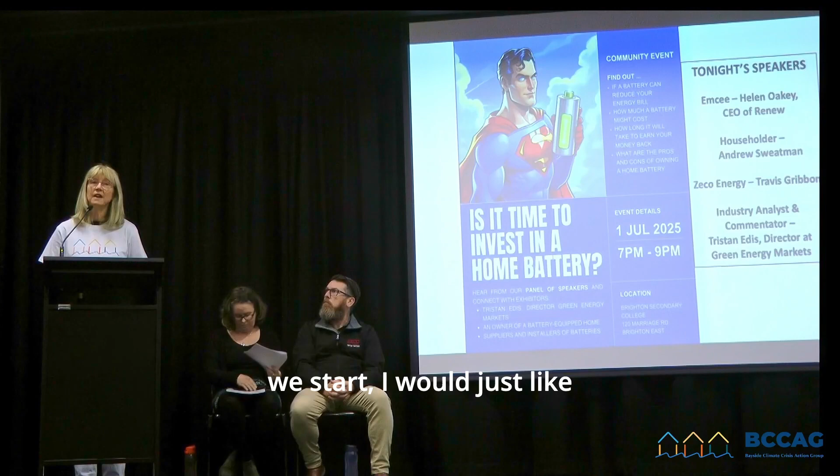Welcome everybody. Before we start, I would just like to acknowledge that we meet on the lands of the Bunurong people of the Kulin Nation, and pay our respects to their elders, past, present, and emerging.

Just to give you a little bit of background on BCCAG, it started about 19 years ago in 2006, and it's grown over the years to currently over 1,000 people receiving the newsletter. I think it was about 1,024, not that long ago.

We are a volunteer organisation and not-for-profit, really looking at how to minimise the effects of climate change and increase sustainable living. We do this by creating and delivering information, facilitating action, and influencing decision makers.

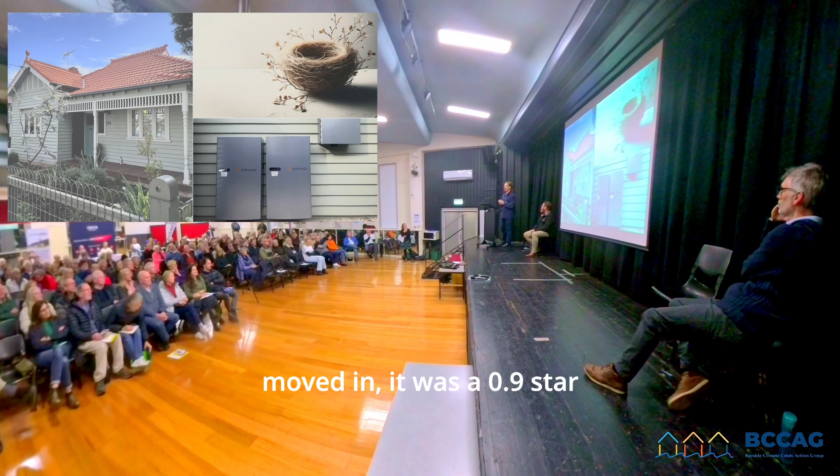It's my wife and I living in the house, sort of empty nesters. We have our son who moved out recently, and it's amazing how, when a young son or young adult moves out, how much energy savings occur as well.

Long showers. And this is our most recent addition, the batteries, which I'll explain in a moment, that go down by the side of our house. And the fact that they're by the side of the house next to weatherboards is a whole other story.

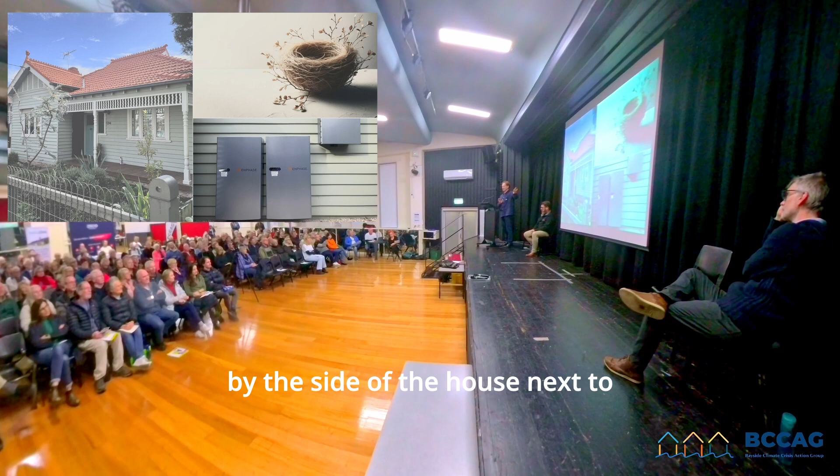So what do we actually have as a system? We have a 10.5 kilowatt solar system on the roof. It's got Enphase microinverters, and there's some trees around the house.

That was a recent revision of what we already had in the house. It's a lithium iron phosphate battery - obviously you're trying to get the safest possible system. It cost about $10,000 all up.

We did do it 9 months ago, but given the amount of time it takes to do any renovation these days, I think we ordered this like 2 years ago. It just takes that long, please.

All right, this is where it gets a bit challenging. So when any salesperson says, would you like a battery, and it's like buying just a fridge, we'll just bang it in - it's not the case. Really, you have to basically make sure it's got space around it, 60 centimetres either side, 90 across the top. If it's near a habitable room, you have to make sure there's fireproofing.

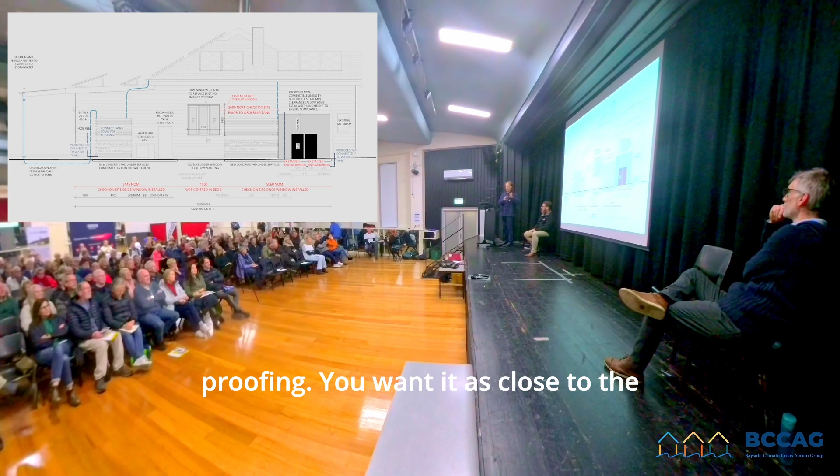You want it as close to the meter system as much as possible. We were trying to do all these other sustainable options, like all the water tanks - they're our water batteries. And we have our hot water system, pumps, etc.

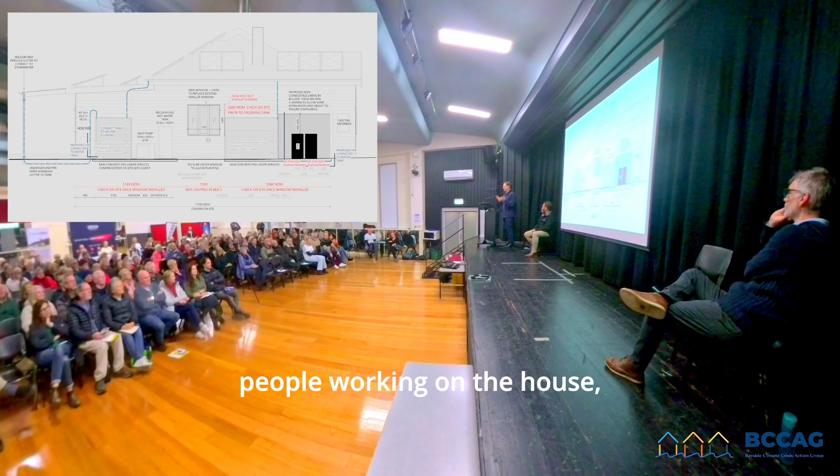The key thing really was, because we had people working on the house - this is probably my OCD tendency - we had to have everyone there on the day. If the supplier said he's going to sell it to us, he or she has to be there to actually back up what they're going to provide. You have to come and show where you're going to put it, not just leave it to the contractor. So we had that person, the electrician, the plumbers, everyone there, because it's really important, at least from my perspective, that you just don't get dumped with the system.

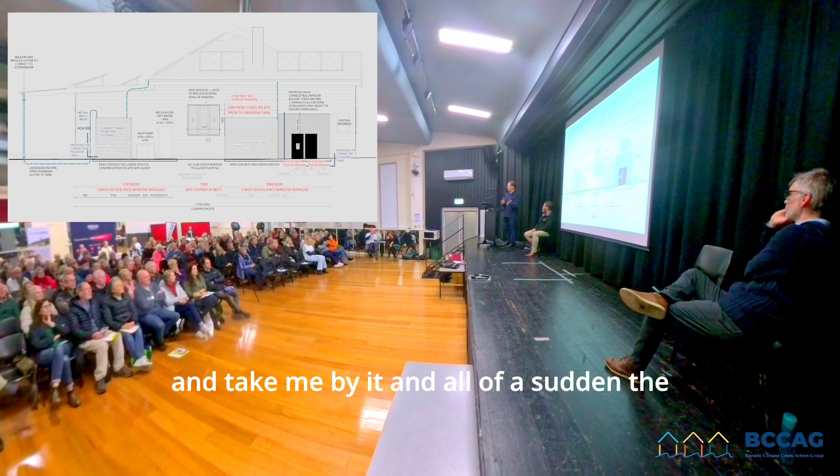It's like you buy it, and all of a sudden the contractor turns up and you wonder what did they sell me, what was all this system about. So it's really important to make sure the line of custody of the person who's selling it to you is actually there on site to represent what the contractor is going to do.

So this is one of the issues we had - we wanted to maintain the heritage style of the house. We really didn't want a big fibro sheet down the side because of fireproofing, so we got a fireproof product. It's on the left, and the front of the house keeps the old weatherboards - you won't know the difference, but that was the whole intent. You could basically go fireproof on one side of the house and keep the rest of the weatherboards without impacting it.

The company was very generous about it. In the end I said I'd spent a lot of time doing project management between these guys and wanted compensation, so I got them to pay me some money, because I'm not prepared to spend 8 hours of my day managing guys who don't know what they're doing on site. They're not bad guys actually, but the fault is in the sales - independent contractors not often talking to each other carefully enough.

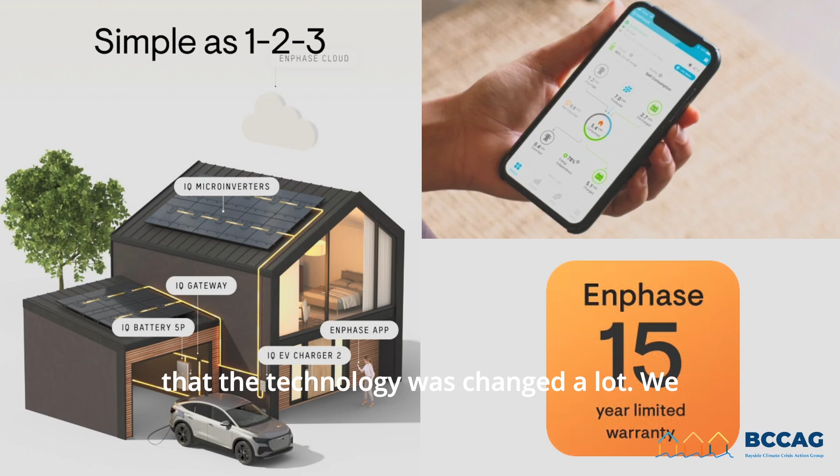Okay, the advantages of the system we chose - we did go with the Enphase system. Again, because we bought it 2 years ago, the technology has changed a lot. We wanted Enphase microinverters with shade management, and as we say in business, we wanted one neck to strangle - we didn't want lots of different hardware solutions. So we went for an integrated solution. It gave us a simple dashboard, and the critical thing is once you get information in the dashboard it improves the system so much, because you get an understanding of how you're actually using the power. We also went with a company with a 15-year guarantee on the system, which was quite important.

Now the disadvantages with the system we went for. We don't have an EV - we almost ticked every other box. We have the solar, we now have the batteries. You might see the banged-up Prius out front - we just don't drive very much, and we're in Northcote with off-street parking. So until we can get some mechanism to take advantage of that, we haven't been able to yet, but we plan to in the future. It wasn't Australian made - we tried to get every other component in the house with local content, but that's not possible. And we don't use a virtual power plant at this stage; I really want to run a year exactly how the system would work, then start to make decisions about how we evolve it.

The bills - this is the source of truth. We can do lots of modelling with everything else, but this is the information we get from Diamond Energy between October and mid-June.

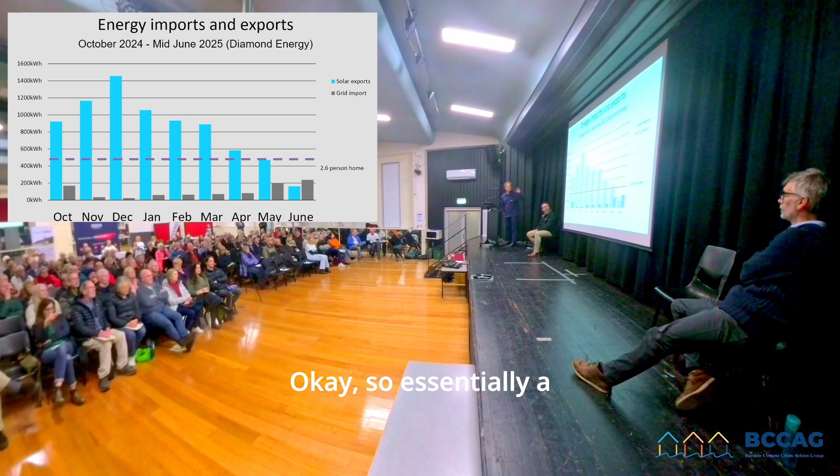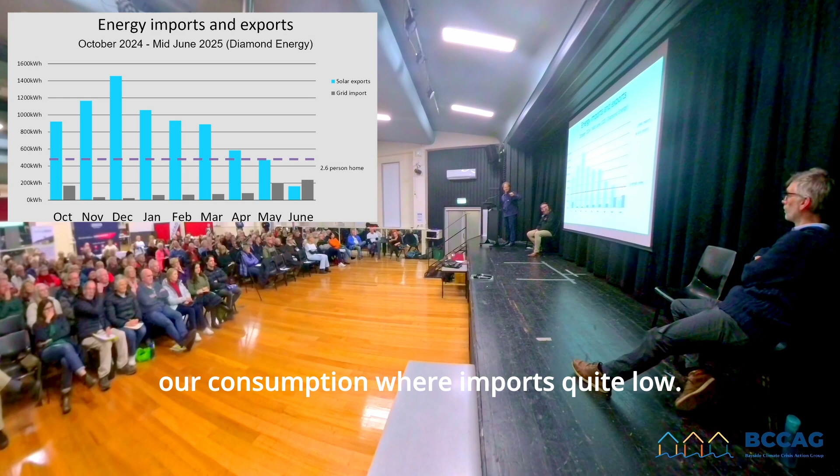So essentially this is a standard household of about 2.6 people - we're about 2.5, though with our Sunday showers it definitely felt like 2.6. The blue is what we push to the grid, so you can see we're doing very well with the solar panels, pushing sometimes 2 to 3 kilowatts over summer. It obviously gets worse in winter, but the battery and our solar consumption keep our imports quite low. That's straight from Diamond Energy, our retailer.

This is how much we spent. In December, we got a credit of $504. Then we got $120, and most recently we paid $12. That's not just the energy costs, that's all the fees and everything. So it's a total bill, we got credit, and it's up there.

But I was wondering, does anyone know why we got a $504 credit at that period of time? A 60-cent feed-in tariff. Bingo! That was a 60-cent feed-in tariff for 3 weeks. If we had gotten the 60-cent feed-in tariff for all of this period of time, we would have made $4,500.

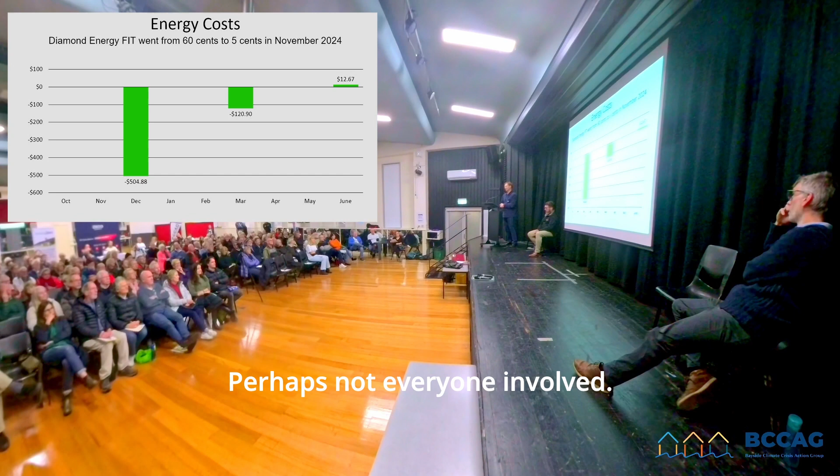So there you go, perhaps not equitable, but how does it change that system? We bought it in 2007. They changed over all the solar panels in October, and they didn't cancel it, they just kept it going for 3 weeks. November 1 was the cut-off date. So it was a strange little series of events.

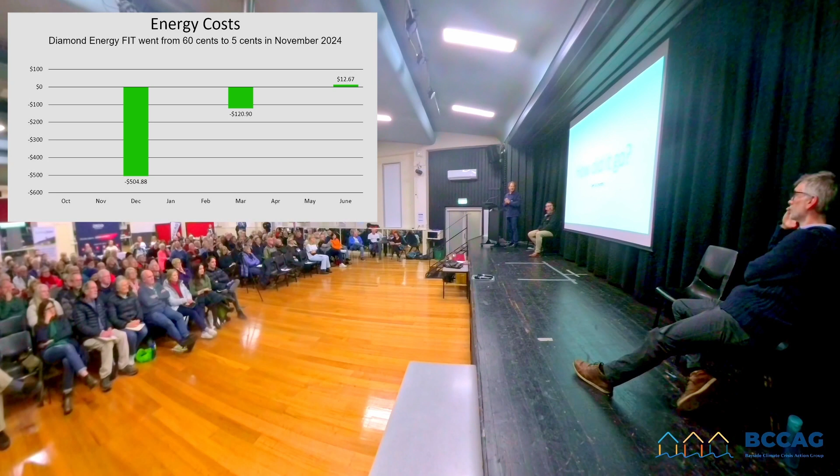Next one. So, how did we go? This is sometimes like the good and the bad, and gee, weren't you going to make more money than that, sort of thing. So over a period of time, last October to June, we've made, well, saved $1,035. Most of that is solar in use. Essentially, like everyone else here, solar is responsible for most of our energy consumption.

We use the panels, we do get a little bit of feed-in, not as much as we got in December, and we use the battery at night. Next slide. So it's only $250 we made in that time, but most of that was summer, and this is what we found—there's such a seasonal difference in these systems.

Next slide. So normally summer, it was great, everyone's enjoying themselves down at Brighton with the sun, and that's reflected in the next slide, which is exactly what happened. The battery at the bottom is the green bit. It barely dips—well, this was Christmas Day, we weren't actually here, so it's a little bit of a cheat. It barely dips at all because we don't really dip into it at all.

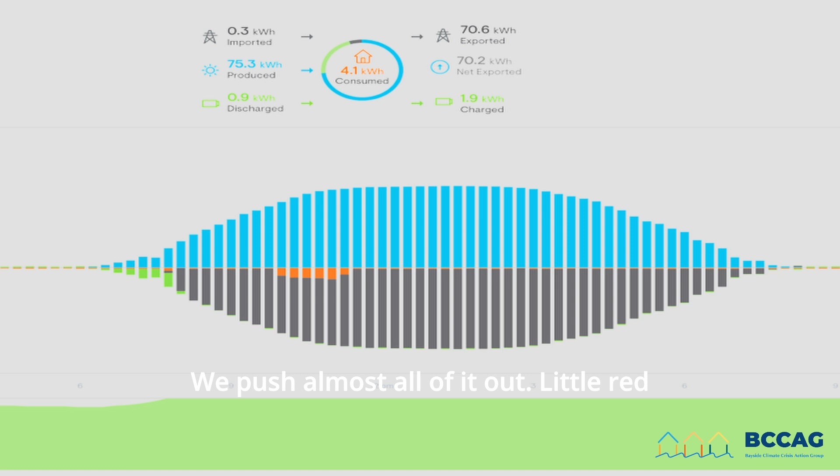We push almost all of it out. The little red bit is where I forgot to turn off the hot water system when we were away, so it wasn't perfect. But essentially, on those days, we barely use the battery at all. It's a terrible return on investment on a day like that for a battery—very good for solar, terrible for a battery.

Next slide. But Melbourne's not always like that, pretty much like today—it's pretty grim. Next slide. We turn on our heat pump, we have underfloor heating in the bathroom, we start to use our induction cooktop—everything a bit more in winter.

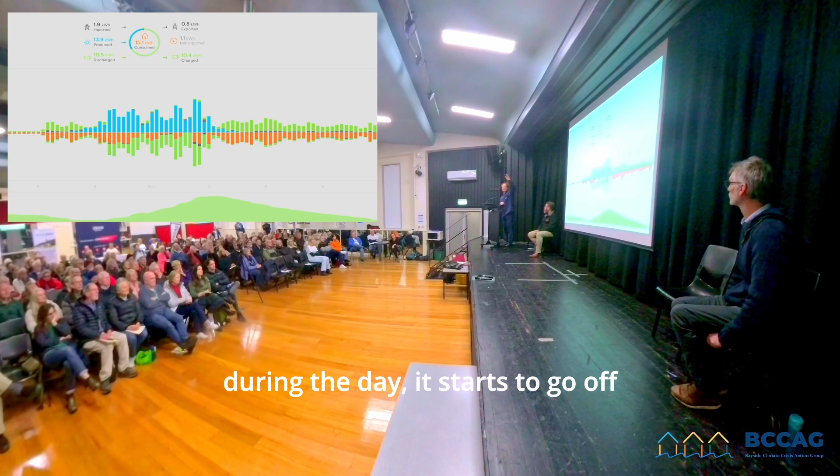And therefore what happens, next slide, is the graph starts to change dramatically. You can see the green bit at the bottom where we're drawing a lot of the battery overnight, dips a little bit in the morning when the underfloor heating in the bathroom turns on for people to have showers. Then during the day it starts to go up again, a combination of us using a bit of power, pulling up the battery, and then we start to pull it down again. So we're discharging—it's like we've got a 10 kilowatt hour battery where we're using it all up. Much better return on investment because we're actually taking advantage of all of the capacity of the battery.

Okay, next one. So this is really the seasonal variation. In December, we may make $4.50. In June, we made about $4. The green bit at the bottom is the solar we're using ourselves. The blue bit on the left is what we're getting from sending solar to the utility.

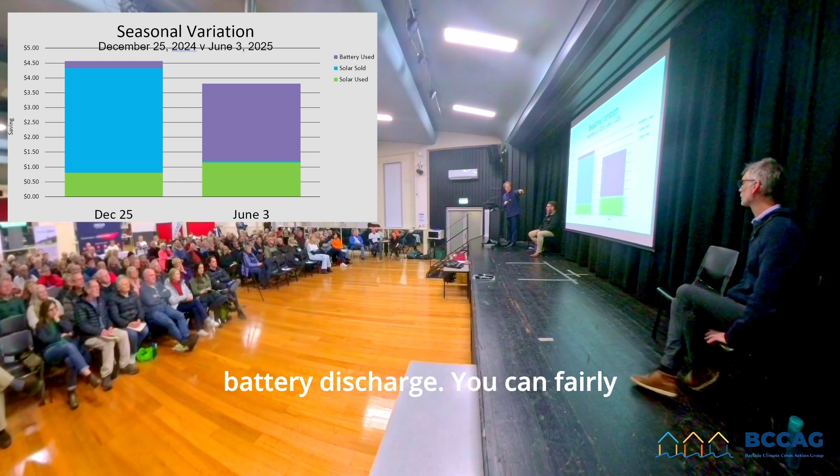And then the little bit at the top is the battery discharge. You can barely see the solar on the right-hand side—most of it is battery discharge. We're not really pushing much to the grid at all. We're using it all up, then storing it, then pushing it out at night. So it's almost like there's two, at least in our experience in Melbourne—two different models, summer and winter, and everything in between.

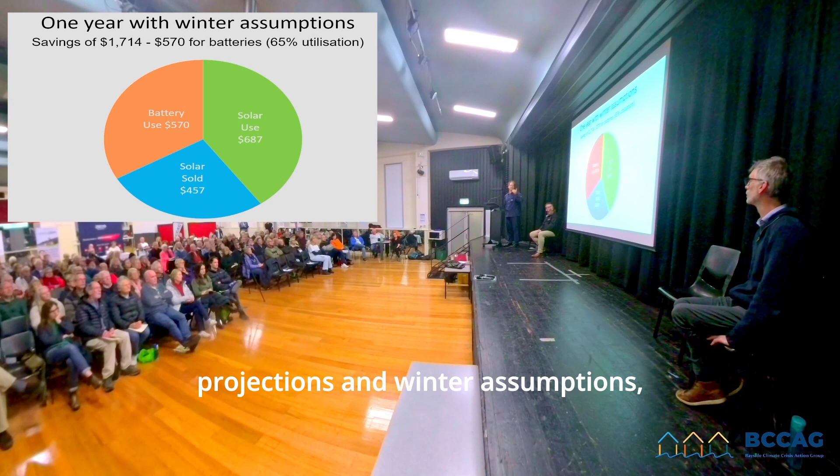Next one. So this means I looked at some projections and winter assumptions—what we would be saving over a year, with a few more months to go. This will probably make about $1,700, with $687 from solar powering us.

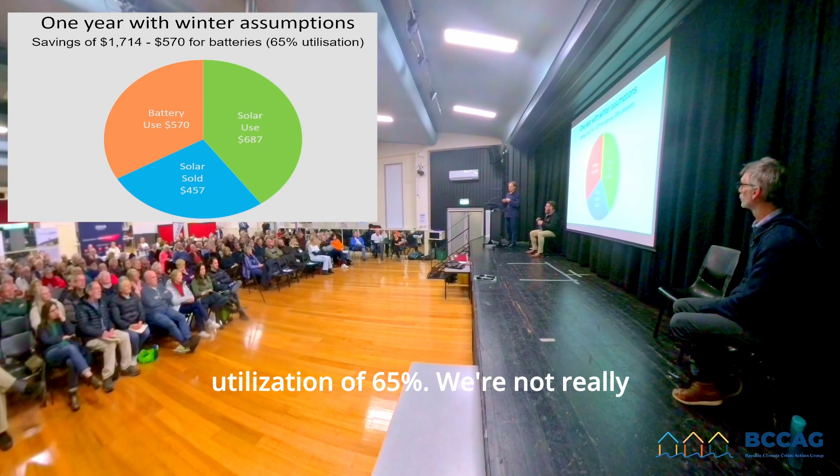We'll be pushing some to the utility, and we'll probably make about $457. But that's because of that differentiation - we're only really using the battery. We've got a 10 kilowatt hour battery, but we're only really utilizing it at 65%. We're not really making the most out of it. Well, one season we are, one season we aren't.

So for the payback assumptions, people shouldn't just do a straight economic calculation. They should actually look at costs going up, battery utilisation going down, a feed-in tariff of 5 cents, and purchasing energy at 25 cents. We found that, pretty much like solar quotes, our return on investment was about 12 years - we paid it off in 12 years, with a 15-year guarantee, so by the end of that time we've made some money.

But we're only using 65% utilisation of the battery. At least we're learning - we're learning what the technology is and how to use it better.

If we were to consider a virtual power plant, a VPP, Diamond could give us $200 to $450 as a sign-on bonus, or at least a reverse fee, and that would give us 30 cents per kilowatt hour in the evening periods. So we could start to make more money - we could make another $687, and probably make $1,248 all year from the battery.

But if we've got an EV and charge it from a combination of solar and the battery, we'd start to make a lot more. So all these people have got EVs - great, that's where we want to be. We want to start using electricity rather than petrol.

So the next steps for us - I'm a sucker for government grants. We took advantage of the green loans in 2007 to get a green loan. When they were phasing out the 60-cent feed-in tariff, we quickly jumped on and got more panels at that stage, so we've expanded from 10 kilowatt hours to 20 kilowatt hours. Based on the assumptions, we'd really like to have an EV to maximise our returns, and maybe a virtual power plant. We'll see how that goes. I really want to run this for a year to see exactly how it goes - my brain is struggling with this amount of information, let alone more.

But the challenge is living in Northcote, we'd have to put some sort of mechanism in place, so unfortunately we're a bit challenged in that area.

So what have we achieved over this period of time? Basically, more importantly for me, we've saved 7.6 tonnes of CO2 from solar use and pushing to the grid via the battery - so essentially we've net zeroed our house plus another house in Victoria. We've gained 84% independence from the grid. I'd love to be even more, but there are limits given the values here - on a cold winter day it's impossible to get 100%. It's just not possible, at least in my opinion.

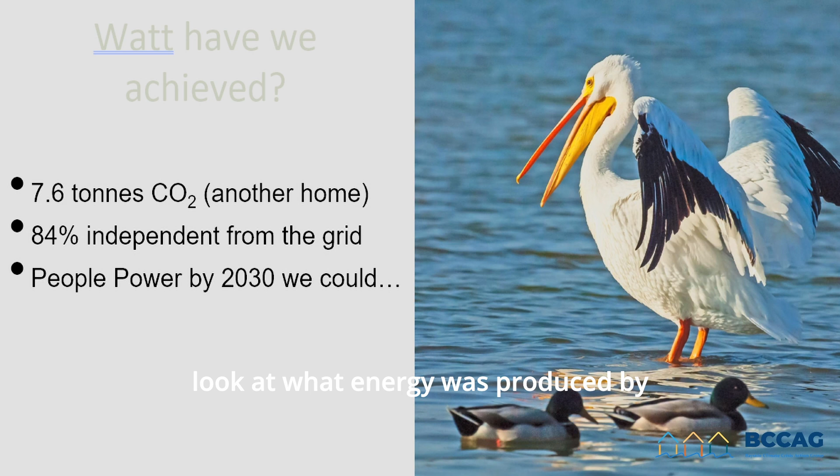But what's more important, and it was really great to see everyone here with the use of solar - I don't know if anyone goes back to 2007, but I imagine I was probably household number 8,000 that got solar panels. There are now 4 million households in Australia. If you look at what energy was produced by solar, it was probably about 12 or 13% household solar. So we've made a massive societal change with, I would say, people power. And whilst batteries won't solve all the problems, at least for me they send a very strong signal to both politicians and society that in the absence of really good energy policy, people will take it up and prove that this is really where we want to be.

By doing these things, we not only get return on investment, we send a strong signal to society and politicians that we should do more. What we've collectively done with solar, we could start to show is possible with batteries. So by 2030, we could have 2 million batteries.

That may start to break the camel's back. Let's get to a platypus stage. When I bought solar panels, they were 10 times more expensive. Anyone buying solar panels now versus everyone who invested in 2007 is getting 10% of the cost. It'd be great if we could get batteries to 50% cost and make it more equitable for everyone to do it as standard. And we can start to support our renewable energy targets. So thank you, let's move away from the duck curve and get to the platypus.

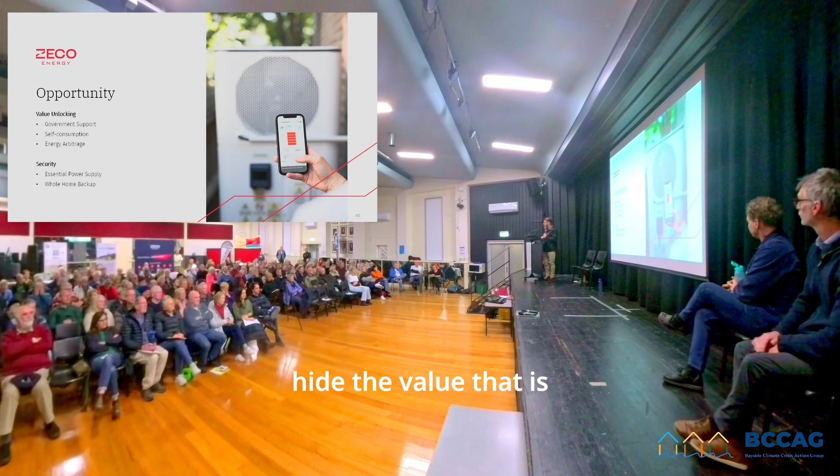So again, and I'm going to say it a lot, it's all about value. How do we unlock the value that's in market at the moment? Anyone who tries to hide the value that's present for any product and price solution is doing you a disservice. So that's the first thing.

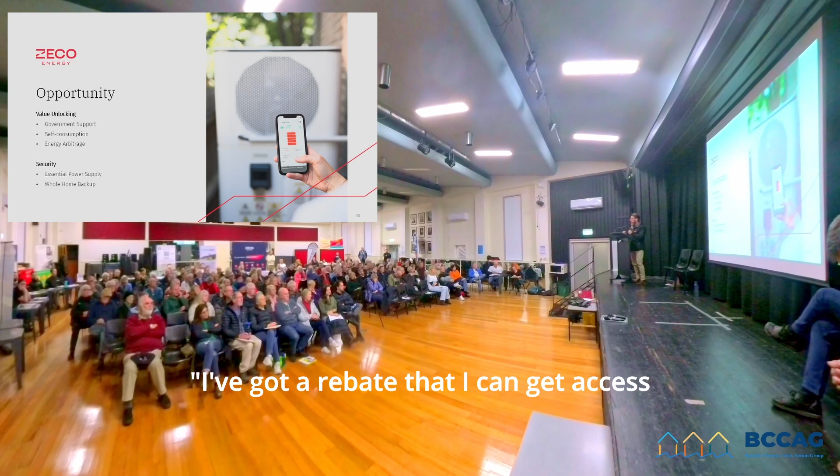As was already mentioned, there's government support - a federal solution based on usable storage that sits behind the meter for your battery. If we use 10 kilowatt hours as a nominal figure, it equates to around $370 per usable kilowatt hour. So you're looking at about a $3,700 rebate as of today. That drops in the new year with STCs, but that's what you're looking at right now as a rebate you can access.

Self-consumption, that was touched on in great detail - I'm glad I didn't put in all of the numbers, which is mine. But self-consumption is your primary focus. About 90% of people here put their hand up for solar. If you don't already have a battery, you will be pushing value out to the grid.

So how do we unlock that? We unlock it by making sure we're already generating it. Let's store whatever we're not using efficiently. That's the opportunity to really unlock some value, without even understanding what everyone in the room's retail tariffs are.

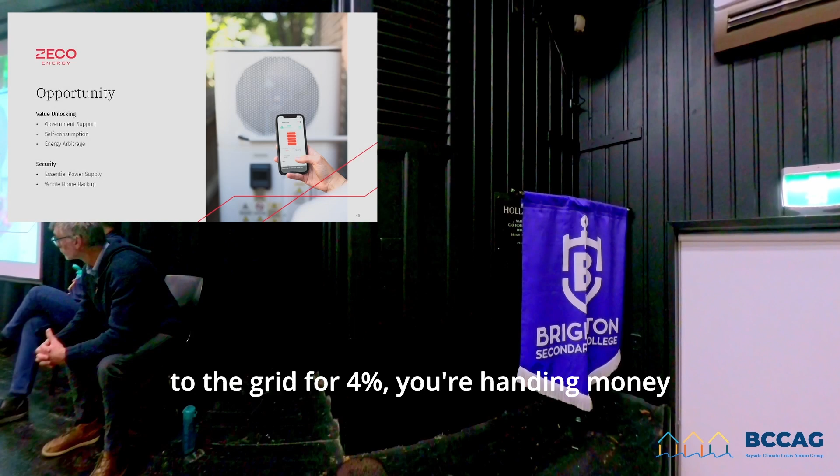If you're paying 25 cents off peak and 35 to 38 cents in peak, and you put in a PV system, you're generating it for anywhere between 6.5 to 7.5 cents. So if it's costing you about 6.5 to 7.5 cents to generate, and you're sending it back out to the grid for 4 cents, you're handing money over to someone who's going to on-sell it. So what we do is save 38 cents basically there.

The next thing is energy arbitrage. I won't go into too much detail, but if you can't generate enough at the moment based on the duck curve, which we're trying to turn into a platypus, we've got the opportunity to do a forced charge during the day. While there's excess production out there, draw that down at a zero tariff, or if you're playing in the wholesale market with something like Amber, you can actually get paid to fill your battery and then use it throughout the day. So from a dollars and cents perspective, that's the value you can unlock.

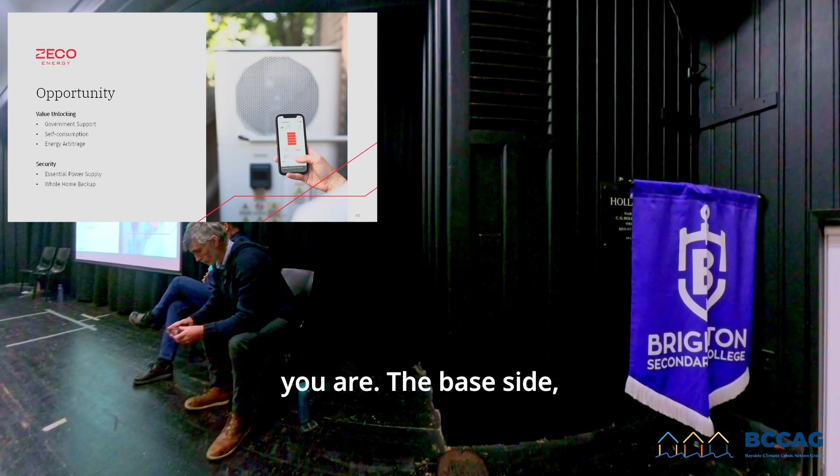Then there's the whole security thing. Depending on where you are - here in Bayside we're sitting in United Energy as a DNSP, pretty stable. If you're in the hills, it makes a lot more sense to look at essential circuit backup, essential power supply, or whole of home backup, because you get frequent outages. We've had instances where someone had a 9-day blackout. That's the reality in some areas - not in this area, which is good.

And as I touched on earlier - if you get product and price offers that don't deal with you and your specific needs, walk. That's the real thing here.

The next pitfall is getting it wrong. If we talk about unlocking that value from a dollars and cents perspective, getting it wrong matters because you get one chance at this federal government rebate and you can't double dip. So you need to get it right first, because it's a first and last opportunity for you.

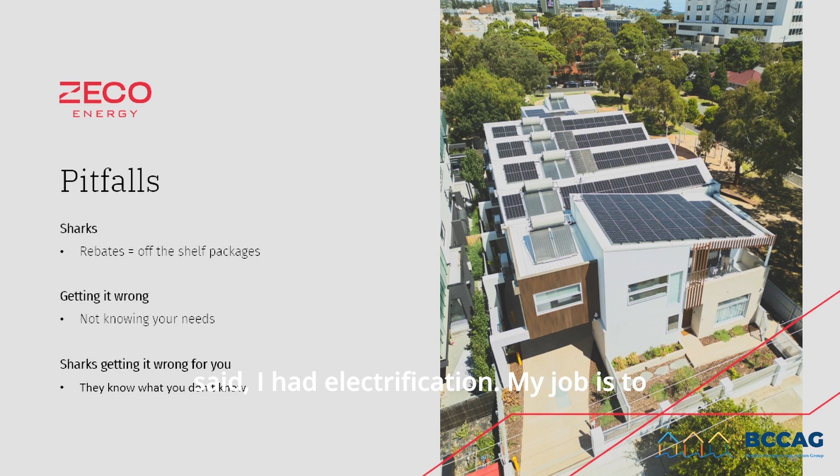Okay, what don't you know? And this is the fun part. As I said, I head up electrification. My job is to demonstrate what it looks like for you to go from two mixed energy use retail bills to as close to zero as possible, believe it or not, with just one - an electricity bill. We need to know what our future home looks like.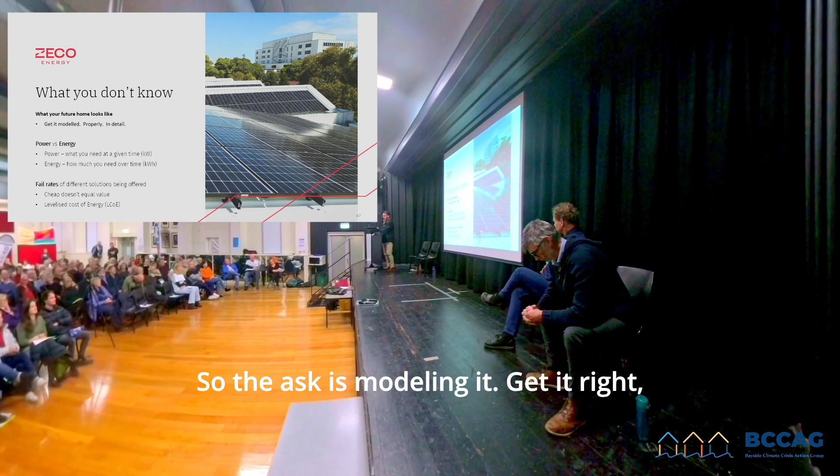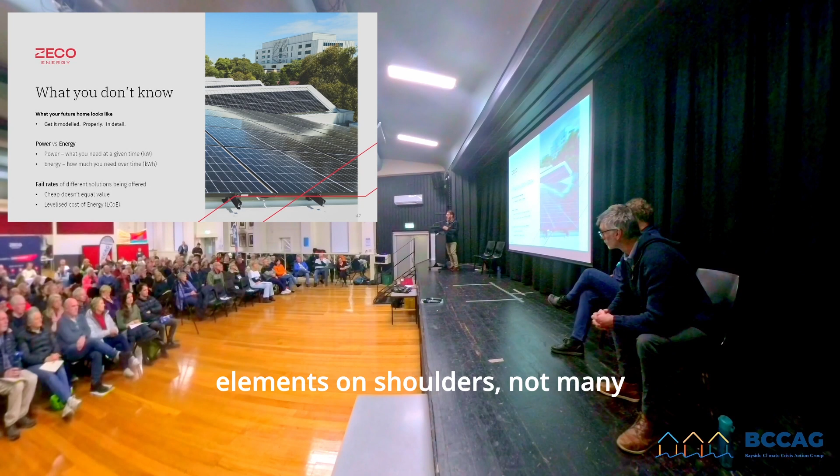If you base all of your thinking around today, you'll be doing yourself a disservice. So the ask is modelling it - get it right, get it done properly, and get it done in detail. Speak to the guys over here at Solving Zero, speak to whoever it is, it doesn't have to be us. But the real opportunity here is future-proofing yourself, your wallet, your home, and the property value as well, by getting it modelled right - because gas isn't going to be here forever, and if you do want to stay on gas, you're going to be paying for the privilege.

What else don't you know?

Power versus energy. There are people who've been in the industry a long time who dropped the 'hour' from kilowatt hours. Power is the amount you use at any given time - how much power do I need in this instance - versus kilowatt hours, which is energy, how much do I need over a given period of time.

You can throw big numbers around, like a 48 kilowatt hour battery, and we've seen this, paired with a 5 kilowatt inverter. What that means is you can only draw 5 kilowatt hours in an hour, so that battery is never going to be fully used. But a shark wants that sort of thing.

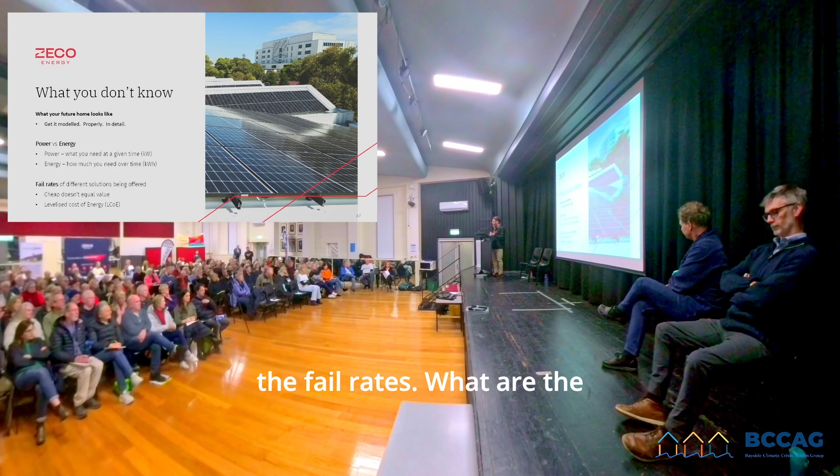Then you've got to look at fail rates. Given there's an incentive, more products come onto the market - a lot of brands or manufacturers out there that didn't have batteries, but now they do because there's an incentive. As a consumer, not in the industry, you don't get to see what the fail rates are, what the problems with a product are, and there's no silver bullet for anyone. You've got to understand what their fail rates are, and if products do fail, what's their support like? Do they have local support? Are they available? Will they come out and fix the problem?

And if I want to nerd out a little bit, it's the LCOE, the levelized cost of energy. This asset is going to last you 15 years - how much value can I extract over time?

Tim, you're the best assistant I've ever had.

So what's the pathway? I've shown you some opportunities, the value we can unpack, and the pitfalls around making sure you don't get coerced into some sort of deal. I just talked you up.

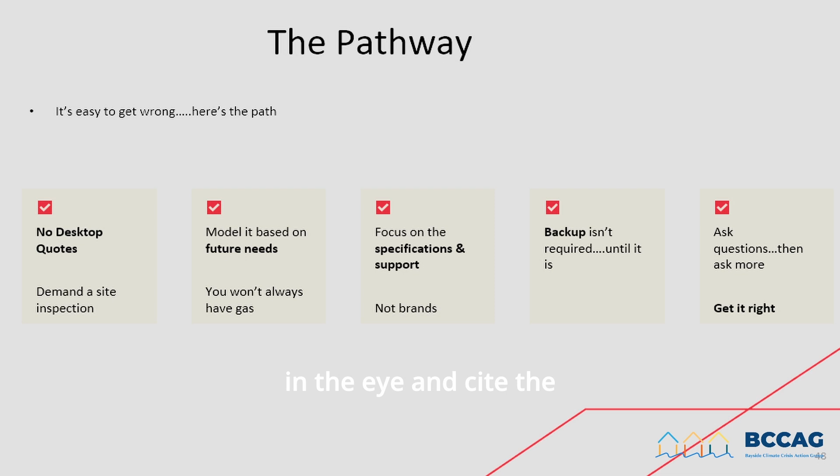First thing: no desktop quotes. Anyone who says 'give me your address and I'll send you a quote' - that happens, you know it does. Great example is cable runs, placement of the inverter, what are we dealing with? Demand a site inspection. If someone's not willing to come out, look you in the eye, sight the property and understand the unique nuances of that specific property, then they're just trying to push a product.

As I mentioned earlier, model it based on your future needs. What you need today versus what you need in 5, 10 or 15 years is going to be very different. Modelling on 5 to 10 years is really important, because that's where you start to see that ramp up in value extraction - we're not always going to have gas.

When the modelling's done, a lot of people ask me, how much is it for product A, and what if I got 2? No one's asked me for a cash price today, which is good, but those are the sort of questions we try to avoid. When I say I don't know what it's going to cost you for a battery, it's because I don't understand your unique situation, and what you need won't be the same as the person next to you, unless that's your partner and you're sharing.

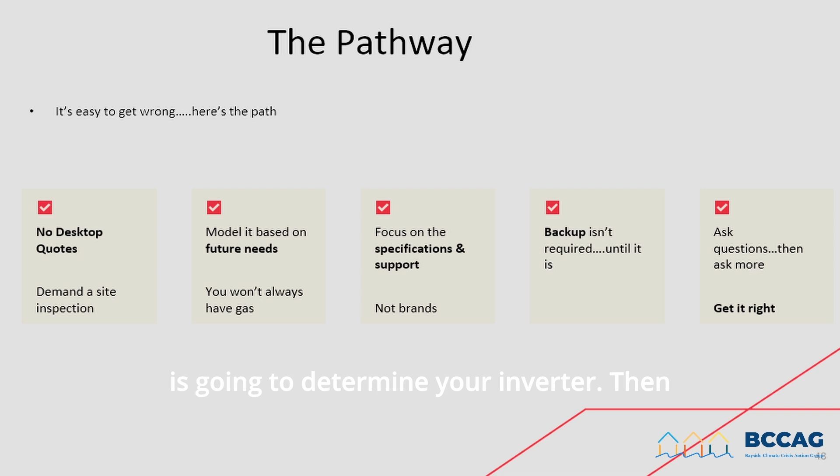Don't be focused on brands. Be focused on: I need this amount of storage, which is the energy, and my power requirements determine your inverter. Once you know that, you can go find brands and manufacturers that meet your specific needs, rather than saying 'this aesthetically pleasing 13.5 kilowatt hour battery is what I want.' Let's focus on what you need.

Backup isn't required, and I touched on it earlier, it's not required until it is. So if you're going through the process, decide if you want backup. Obviously medical needs and so forth are another consideration altogether, but make a call on that early. When you're dealing with the market, make sure they're fully aware of whether you need backup or not.

Ask questions. Ask lots of questions, and when you've run out of questions, ask people who have already gone and got a battery before what they wish they'd asked previously, and then you'll get it right. So that's it. Thanks.

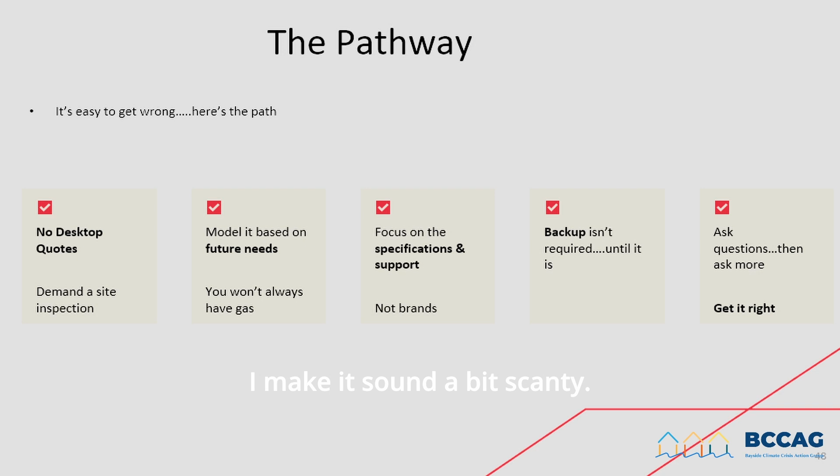Make it sound a little bit scary. It's a $10,000 to $15,000 investment, and I want to get it right. I've got a question that Tim pre-prepared for you, which I almost want to ask now, which is, will my battery burn my house down? Yeah, absolutely.

Okay, so we're going to go really big picture now and look at the policy landscape, thinking about how batteries might actually impact our decentralised energy system. So I'd like you to welcome Tristan Edis, who's going to talk to us about the bigger picture. Thanks, Tristan.

Thanks for being invited to present. So I will bombard you with numbers, unfortunately for you, and hopefully you can see them on the screen. I'll do my best to try and explain them. Tim, if you can go across.

So the business that I run provides research reports, essentially market research reports for large electricity companies and large energy companies. And in spite of Tony Abbott coming along, there are actually a number of carbon credit style certificate markets out there, and we make a living analysing those markets on behalf of a number of energy companies, and also helping them inform investment decisions around building large wind farms, large solar farms, not so much large batteries. We also do forecasting work for the Australian Energy Market Operator, who are trying to plan their electricity system on our behalf, and whether we need to build transmission lines or not, where we need to build them. And as part of that, we do some work on trying to forecast how much rooftop solar will be installed.

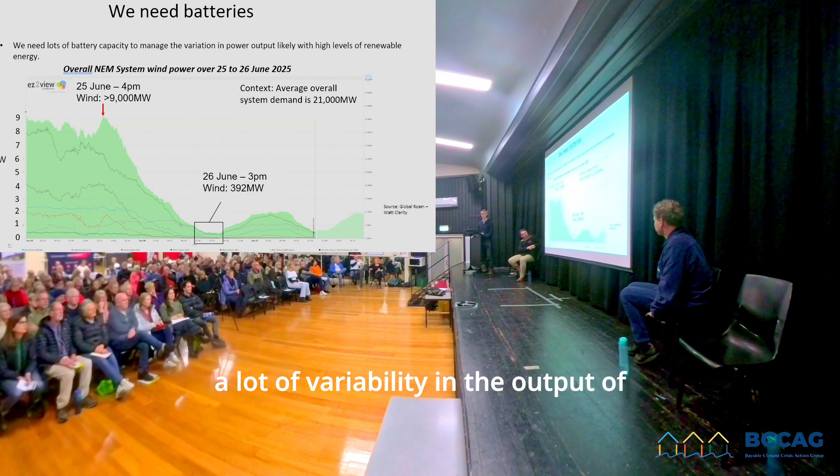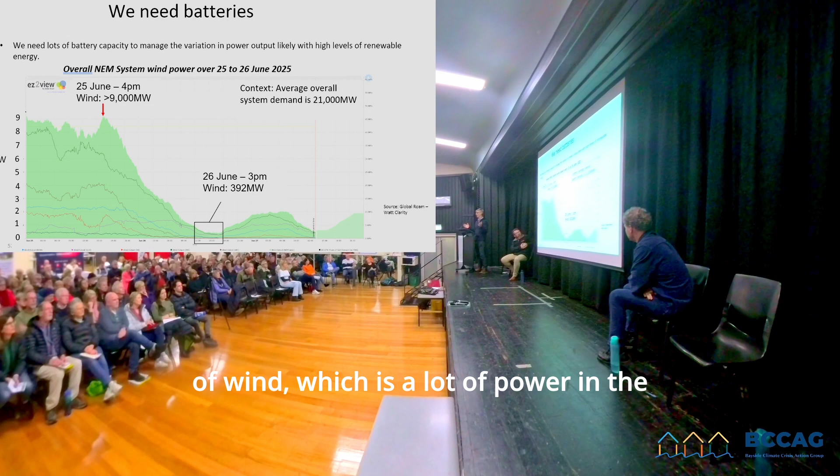A few years ago, I'd probably like to think that if we started installing more wind farms in Queensland, we'd even out a bit of that variability, but it's unfortunately not proven to be true. So over the space of a little over 24 hours, we were producing at 4 p.m. on the 25th of June, 9,000 megawatts of wind, which is a lot of power in the context of the overall system. Average total electricity demand is about 21,000 megawatts, so we were producing 9,000, almost half of that. And then by 3 p.m. the next day, we were producing just 392 megawatts. So a very small fraction of total demand within the space of a very short period of time, which is why we need batteries. They're going to be an important part of the solution in order to get ourselves off fossil fuels. So that's the context of wind.

But we're already getting to a point where we've squeezed out a lot of the fossil fuels in the middle of the day. And according to our forecasts, if they're right, that we produce for the Australian Energy Market Operator, we are going to have a lot more solar than what we have today. So we are going to be pushing to the point where actually we're meeting all of the electricity demand with all the solar that's installed. So if we're doing that, we're going to have to spill a whole heap - we're not going to be able to use it all.

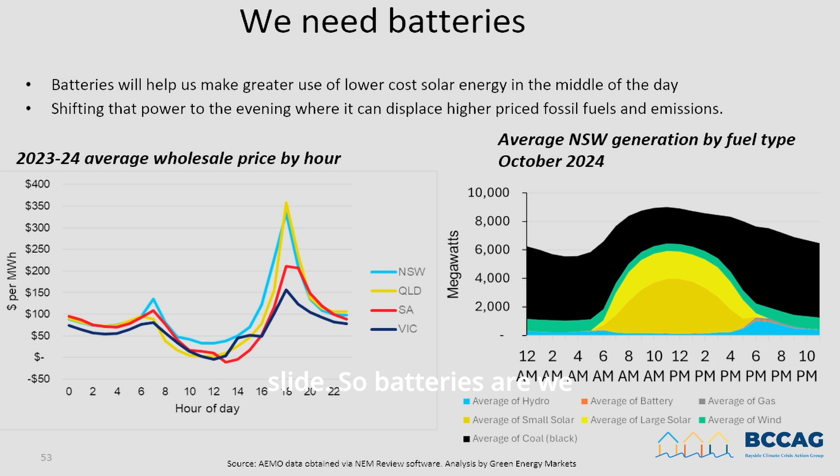So batteries - we can see we need the batteries today. That's what the market is telling me in the data I'm seeing - we needed batteries, and we needed them probably yesterday, but we definitely need them today.

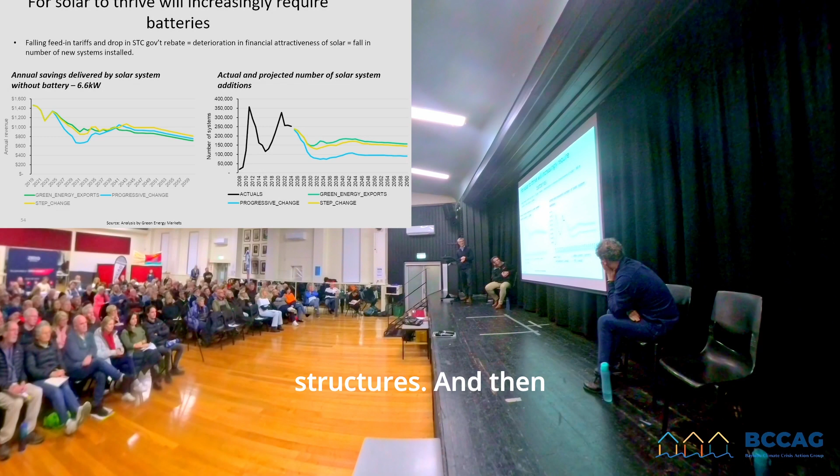Now this is a little bit of modelling, economic modelling that we've done for the Australian Energy Market Operator. What we do there is we've got a whole heap of different input assumptions around what electricity prices households are going to be paying, by what time of day, what networks are up to with their tariff structures, and then we try to model out what the feed-in tariff might be - modelling all that out to how much money a householder will save on their electricity bill from solar out to 2060, and what that would mean for their payback on the system, and therefore how many people are going to be willing to install a solar system.

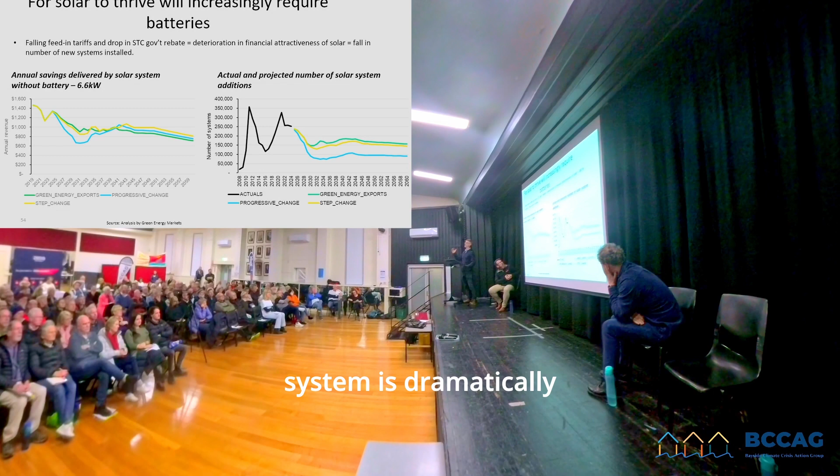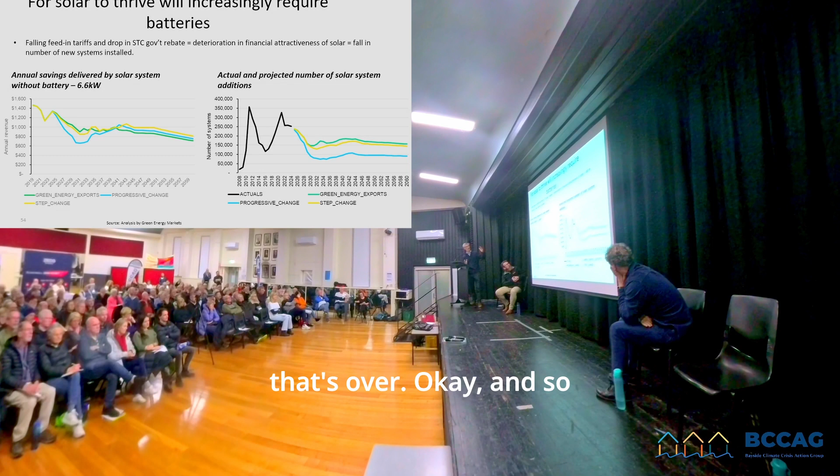Our modelling suggests, and you'll probably see it on your electricity bill this new financial year, that the amount of savings delivered by a solar system is dramatically falling relative to 2019. We had a bit of a spike upwards thanks to Vladimir Putin pushing up the cost of gas and coal, so you can thank Vladimir for improving the returns on your solar system for a short period of time, but that's over.

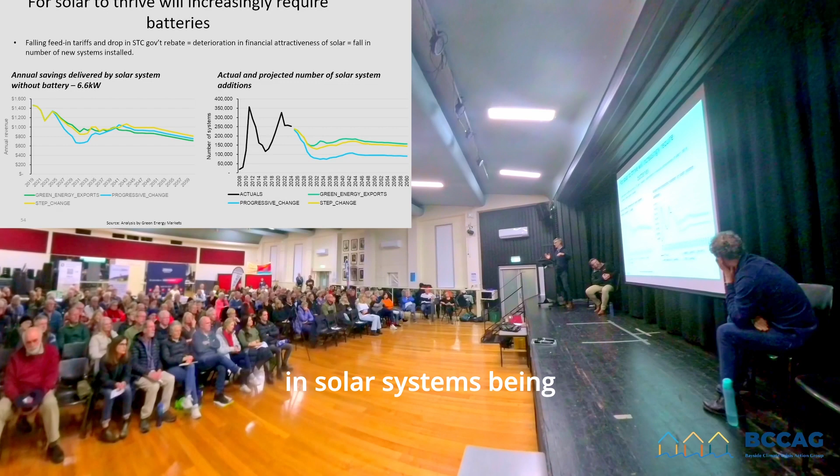So that black line is the total number of systems installed in Australia. We saw very few in 2008, then a spike up to about 350,000 systems, I think in 2012. Then a whole heap of subsidies dropped off - the feed-in tariff dropped, and the federal government rebate for solar systems dramatically reduced - and we saw a plunge in solar installs through to 2015.

So anyone that tells you it's onwards and upwards doesn't know what they're talking about - they just have a very short memory. Then we saw a revival of solar system installs from 2016 onwards.

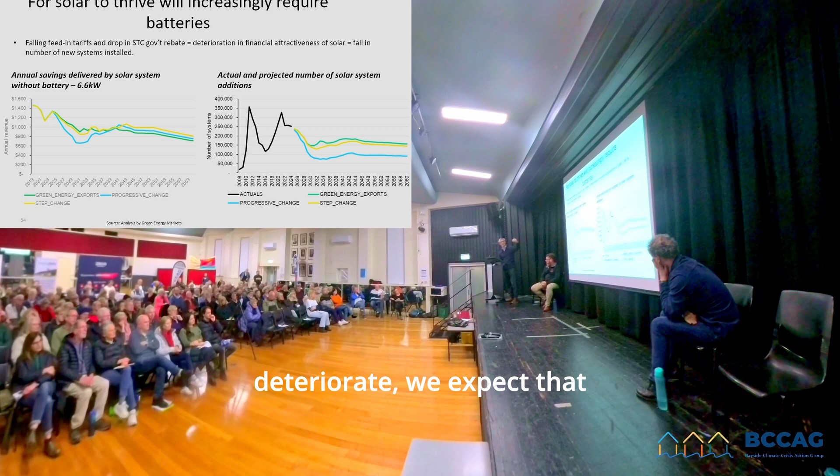And why was that? Because electricity prices started going back up, and people started talking about it and worrying about it. The financials of a solar system looked better, so more people installed them. But as those financials deteriorate, we expect the number of people willing to install a solar system to decline substantially from where it's been over the last few years.

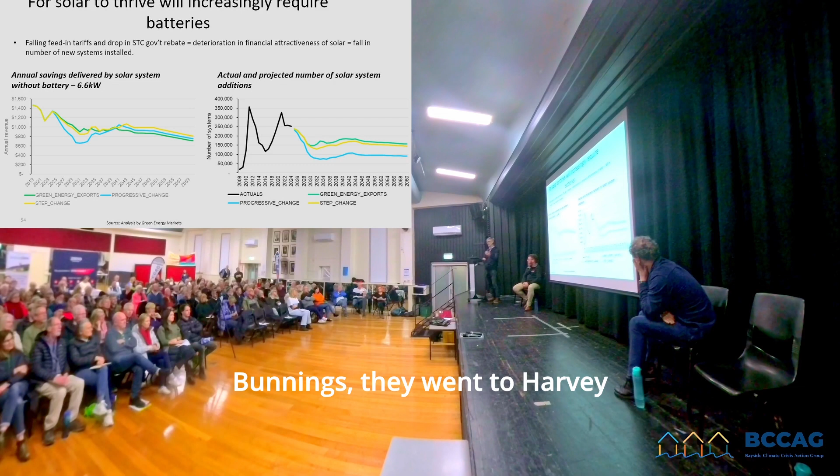We also got a little fillip from COVID because a lot of people couldn't spend money on going out to restaurants, and sitting at home they thought, geez, I'm spending a lot on my electricity bill, I'm stuck at home. So they went to Bunnings, they went to Harvey Norman, and got a solar system installed. There was a bit of an artificial spike there that probably wouldn't have happened were it not for COVID, but our forecast is a major decline in solar system installs looking forward.

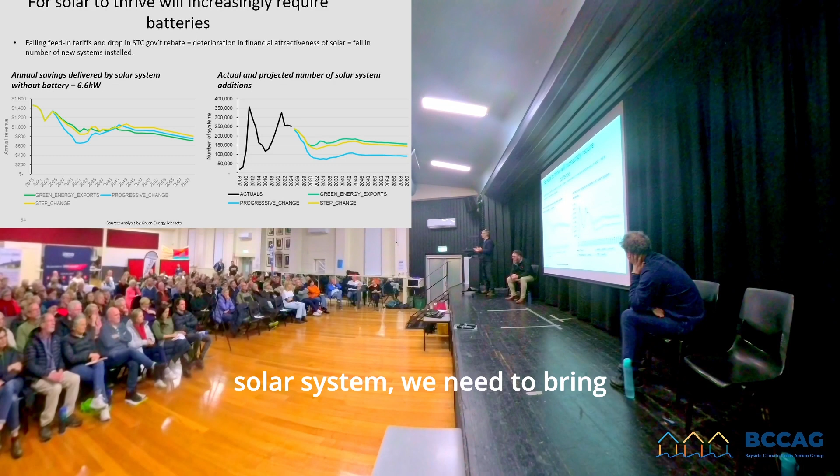Partly it's a saturation effect too - you've already got one, you don't need one, so you end up tapping out the market. So to ameliorate that loss of energy savings from the solar system, we need to bring batteries in to improve the overall financials of the total system.

If you move on to the next slide - this is a picture from our little model. We model a figurative household of how much electricity they consume by time of day, then punch in what the solar system would generate based on variation in solar output from BOM, and then work out how much of that solar generation they'd self-consume.

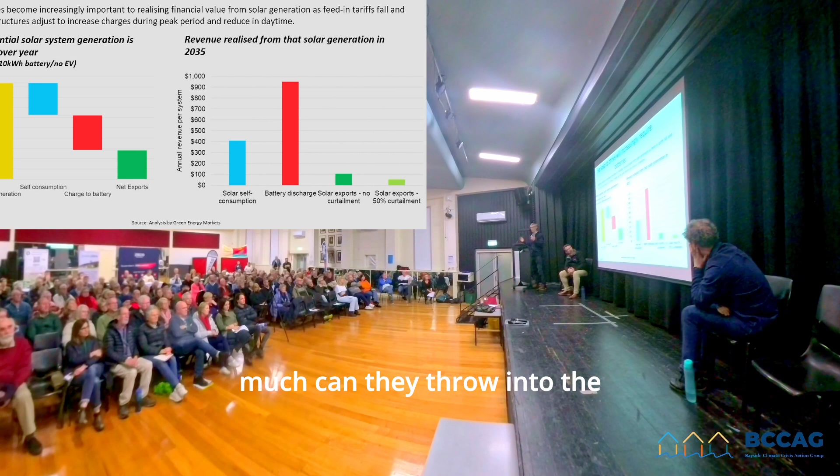How much can they throw into the battery, and how much would they end up exporting to the grid? This is an averaged household, which doesn't exist, of course, but in aggregate it's a decent picture for what people will see in the financials. About a third goes into each of those things. This is for a 6.6 kilowatt system - most people are installing something much bigger than that, and a 10 kilowatt hour battery, nowhere near.

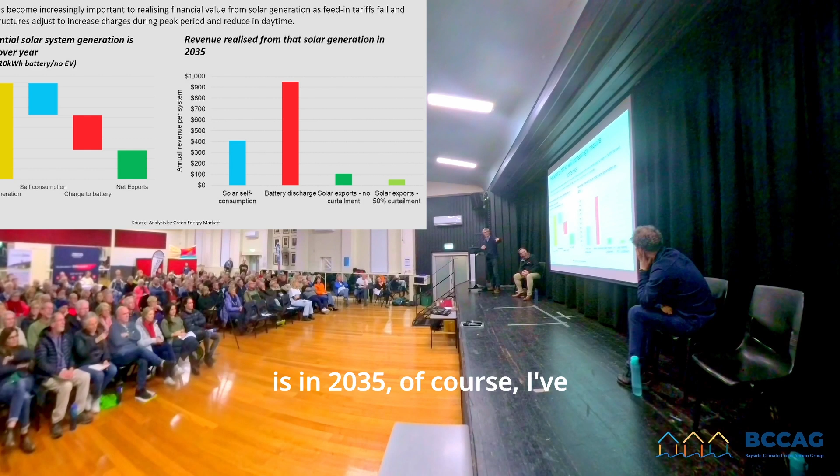Then how much money do they make out of that? Solar self-consumption is $400 - and this is in 2035, with different assumptions there. The battery discharge will make the lion's share of the money out of that. Even though it's a third of the generation, it's the lion's share of the savings from the aggregated system that will be due to the battery, from what we can see. And you'll make barely anything from the solar exports.

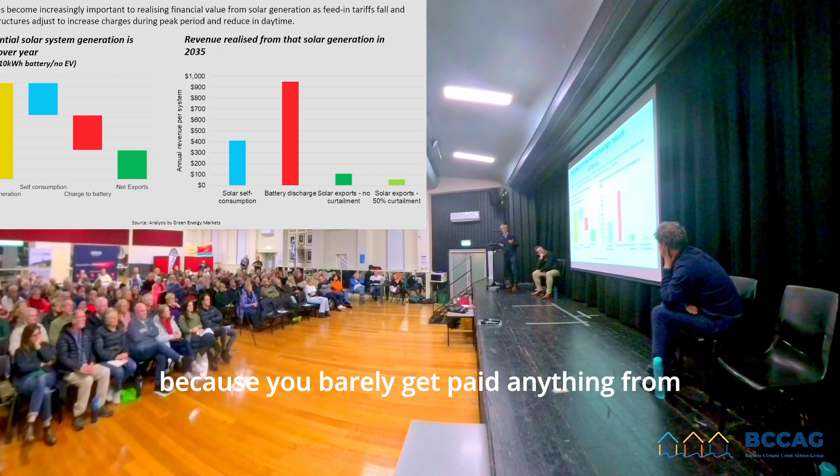In fact, you might find your network wants to switch off your solar system on a somewhat regular basis, so you can have a bit of curtailment. But you don't care because you barely get paid anything for solar exports anyway. So that's the picture we have for the future, suggesting batteries are really, really important to the financial returns on solar, and will hopefully keep people wanting to install solar, but also large wind farms and large solar farms.

We want to move to the next slide. So this is kind of our picture. The blue line is battery installs per annum.

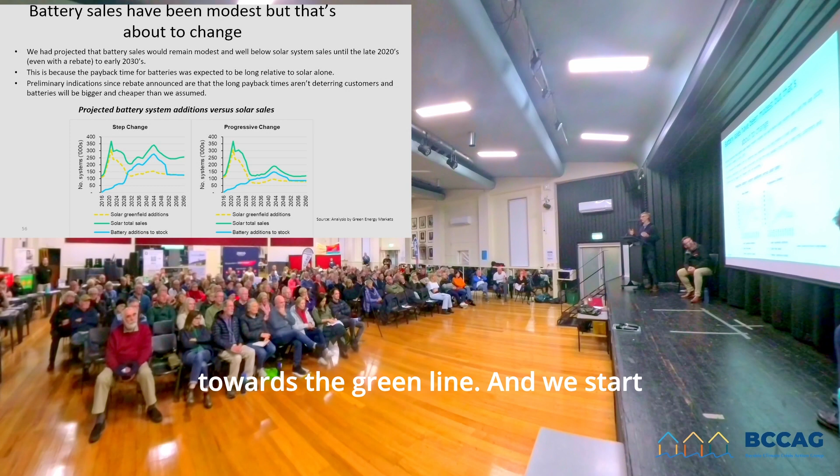So in 2016, barely anyone was installing batteries. And in the green line, I've got solar system sales for two different scenarios, step change and progressive change. Essentially you get the gist: batteries are tiny in terms of the numbers being installed relative to solar sales historically. But then what happens is that blue line starts spiking up towards the green line, and we start seeing almost all solar systems, according to our forecast, installing a battery system.

We can see that happening, and in this step change scenario, we included a rebate almost exactly the same as what the government has announced in that forecast. But we didn't anticipate much change in battery uptake till about 2028, because we did the sums and we went, oh, batteries don't pay back. They take a really long time to pay back on the investment, so people won't be that enthusiastic.

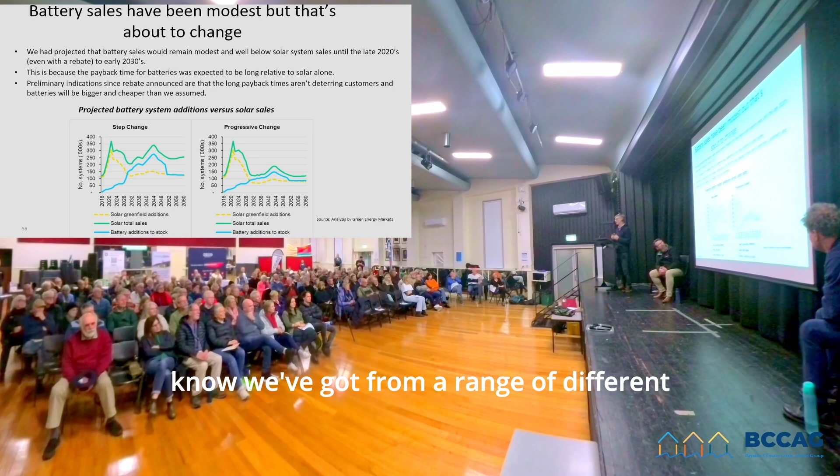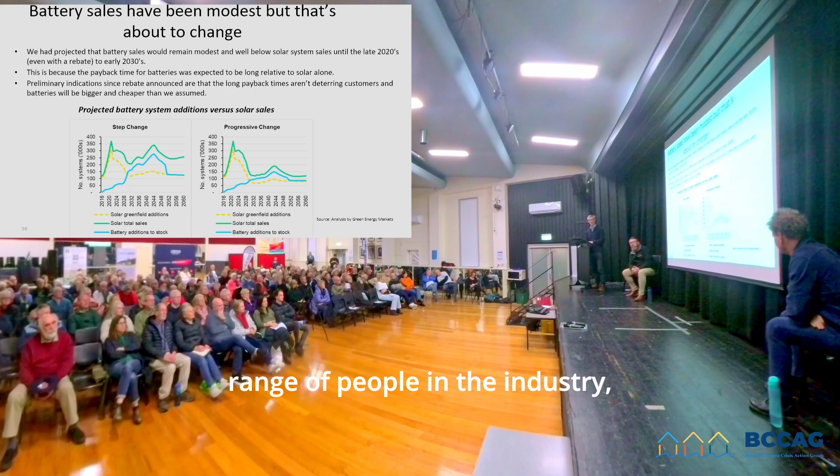And we already know we're wrong. From a range of different information sources, we know that people are really enthusiastic about batteries, and we'll probably see that blue line jump up much closer to the green line this year, based upon what we're hearing from a range of people in the industry. Which is great news, but it also means people are being persuaded to install a battery.

We buy lots of things without looking at the payback. We buy very expensive cars based upon the fact that we think they're cool and they impress our neighbours, that sort of thing. And if you feel like that for a battery, I think that's awesome, because that's going to help the whole community. And the fact that the payback may not necessarily be sterling relative to a range of other investments, or putting your money in super or something like that—it's great.

Go do it. We had kind of been quite ruthless in looking at historical patterns for payback, but I think in the end we were too pessimistic about human nature, and people are going to be more likely to install batteries than what we thought, which is really good. And the other thing is they're going to be much bigger than what we thought they were going to be.

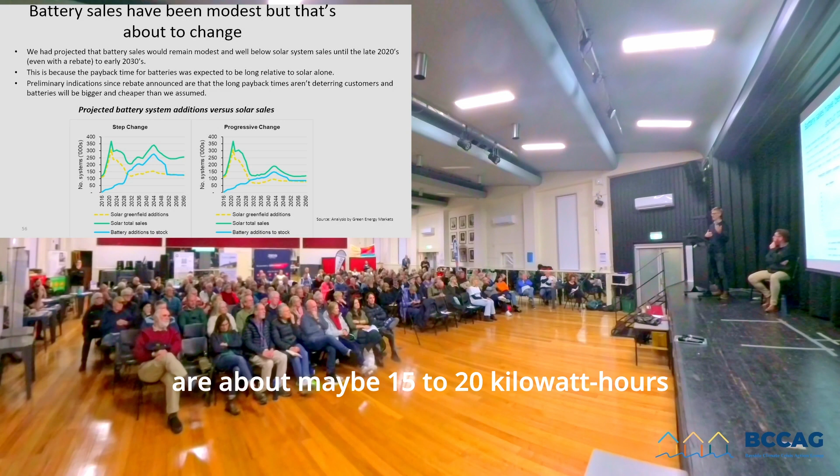We had anticipated the average size of a battery system historically in the last few years being about 10 kilowatt hours. And it looks like people are generally going to go for systems that are about maybe 15 to 20 kilowatt hours, because of some other things to do with installer economics.

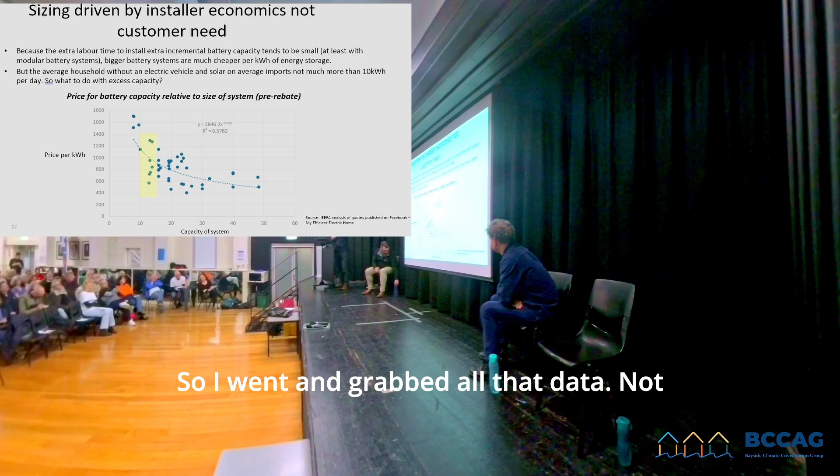So if we just move to the next slide. I collected a bunch of data off a great website that Tim Forcey is responsible for, called My Efficient Electric Home. Lots of people are posting quotes that they've received for their battery system, and also often for a solar system in combination. So I went and grabbed all that data—not all of it, by the way. This is just a small sample.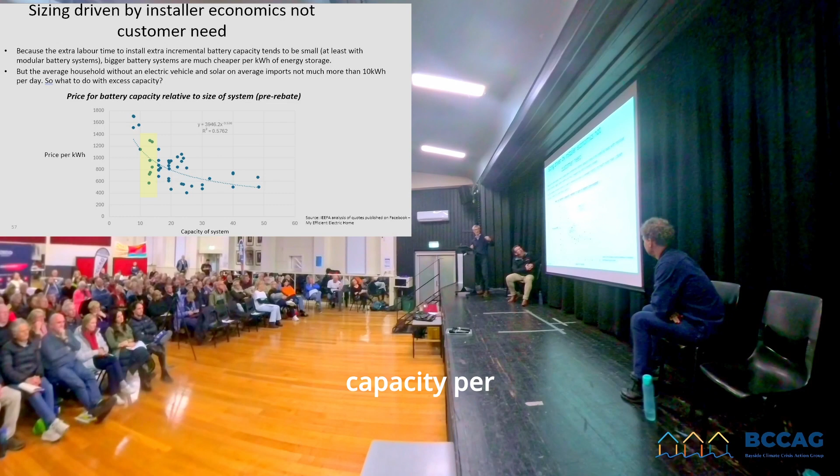Each dot is a quote for a battery system, and along the bottom is the size of that system. We've got systems getting up to 50 kilowatt hours. On the vertical axis is the price people are paying per unit of capacity, per kilowatt hour. What we see is you go a smaller system, you pay way more per kilowatt hour; you go a bigger system, you pay way less.

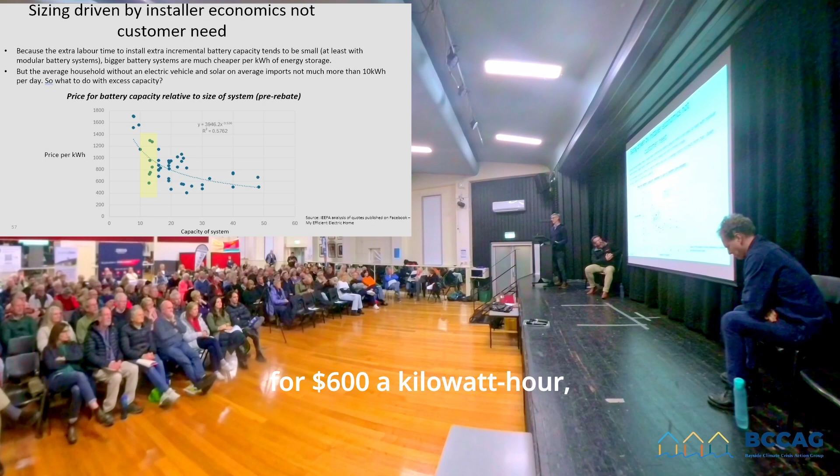Our assumption in our model was that the average price people would be paying was $1,100 per kilowatt hour for their system. What you can see is a number of those quotes are well below $1,100. There are people out there picking up battery systems for $600 a kilowatt hour, a number of them. And these are what I would call reputable brands, many of them—highly reputable brands that make up a very large proportion of the Australian market. That doesn't include Enphase, who are right at the top end, by the way, in the quotes that I saw. Enphase are absolutely top of the market.

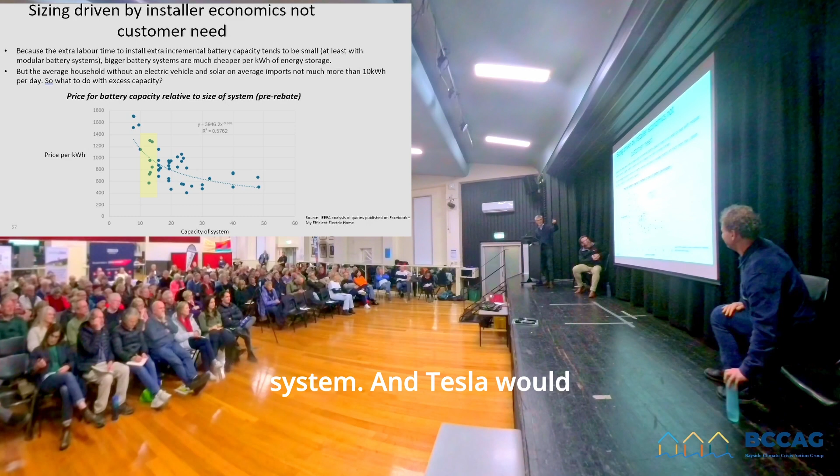Although you got a really good price on your Enphase system, two years ago. And Tesla would be about 1,000 to 1,200 dollars per kilowatt hour mark, which is a good, well-known brand and a good quality system. But some of those other systems are from highly reputable, large Chinese manufacturers who do supply good quality product and have for some time in inverters, for example, and generally you'd probably expect it will be a reliable product that will get good support.

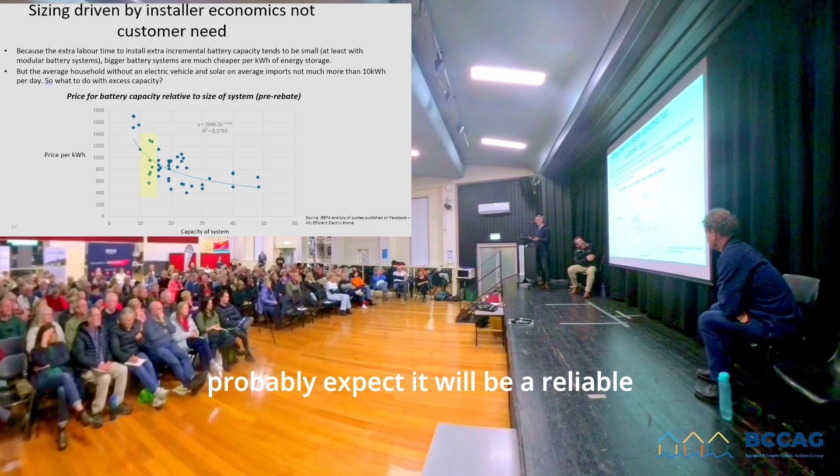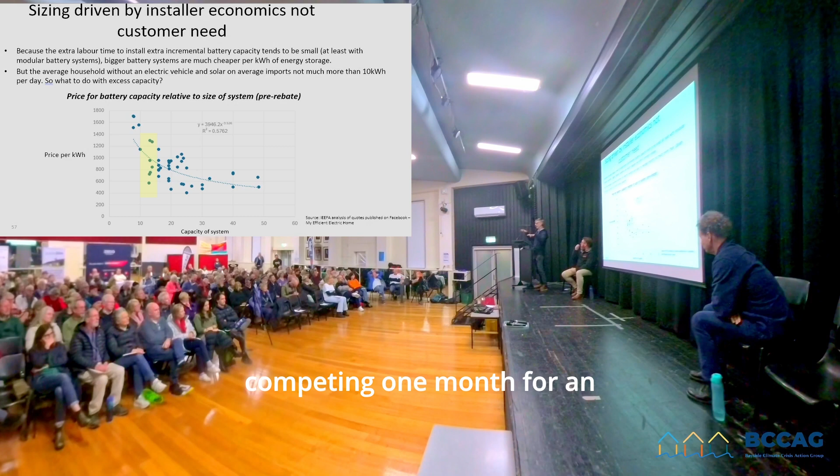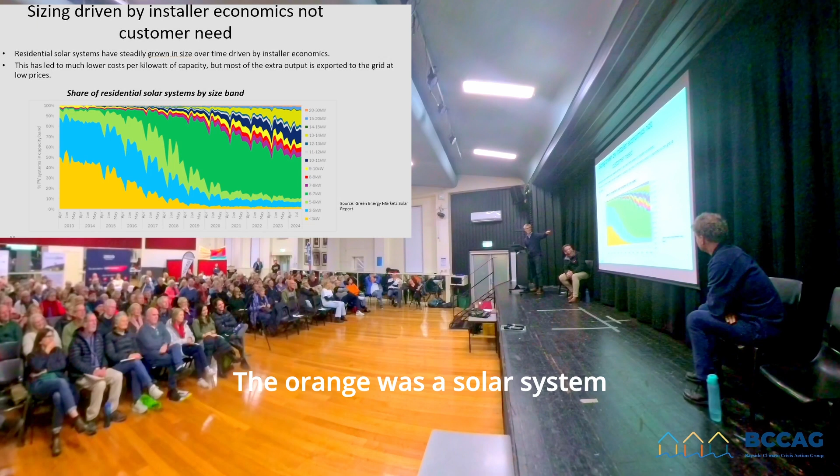So if you move to the next slide - this is a bit confusing, I know, but we're going back to 2013 here. The orange was a solar system less than 3 kilowatts. They used to dominate the market, and then the next one after that was less than 5 kilowatts, that was the blue. So they dominated - almost 90% of systems were smaller than 5 kilowatts. Now they'd struggle to represent about 5% of systems being installed in the residential sector today.

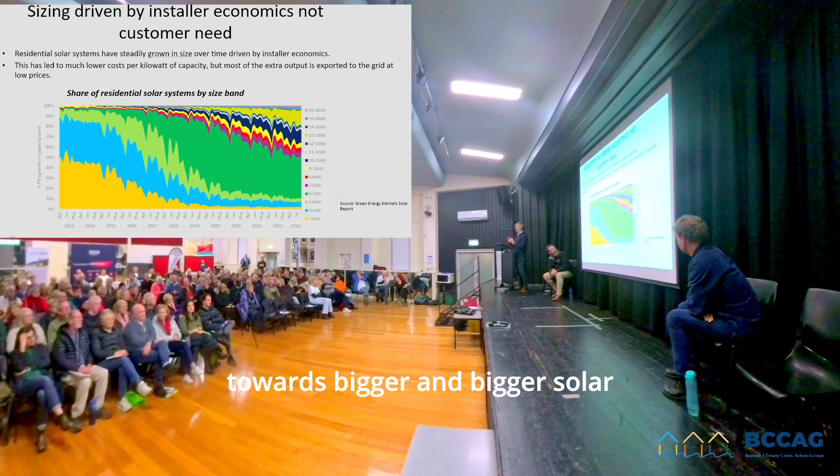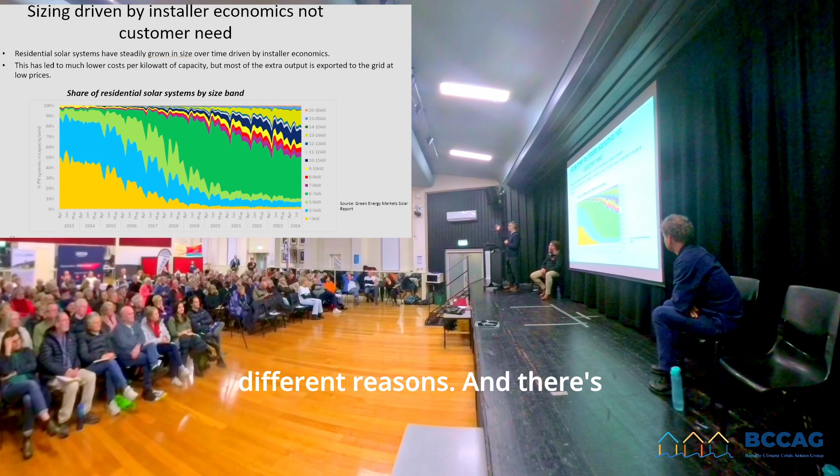People have moved towards bigger and bigger solar systems over time. Their electricity consumption hasn't gotten any bigger over that time period - in fact it's got a little bit less in some cases. But what's happened is a bigger solar system is much, much more profitable for an installer for a variety of different reasons, and as module prices have got cheaper...

It's about labour efficiency. They've got to get a bunch of guys up on the roof, get them to site, get all the panels to site - that is a big chunk of the cost. So once you've got them there, you might as well get them to install as many panels as possible, because panels are really cheap. Labour is expensive, panels are cheap.

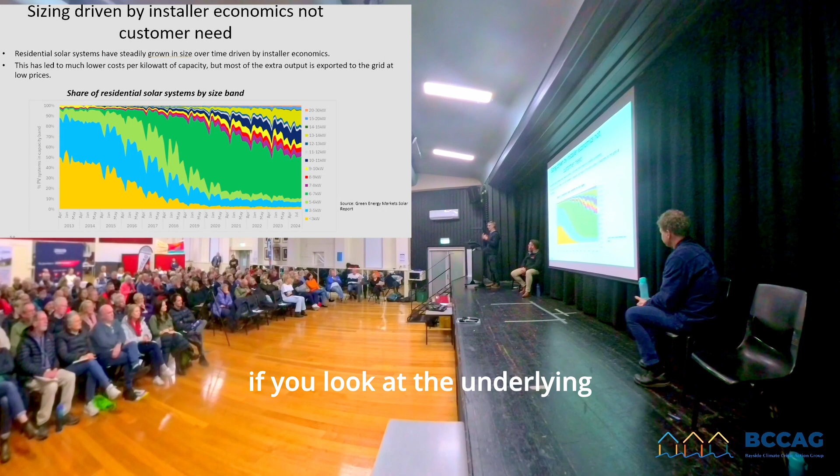And the interesting thing about batteries is they're still reasonably expensive per kilowatt hour, but if you look at the underlying cost of the cell, which looks a bit like an AA cell - your battery is just a collection of those cells - they're really cheap, but that hasn't flowed through yet to battery pricing. That's at a wholesale level. That will eventually happen. And a number of the battery systems are so easy to add additional capacity to - it takes very little extra time.

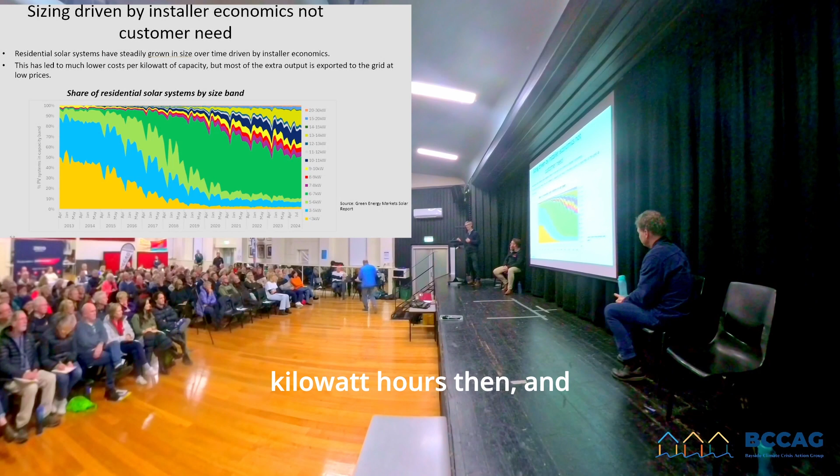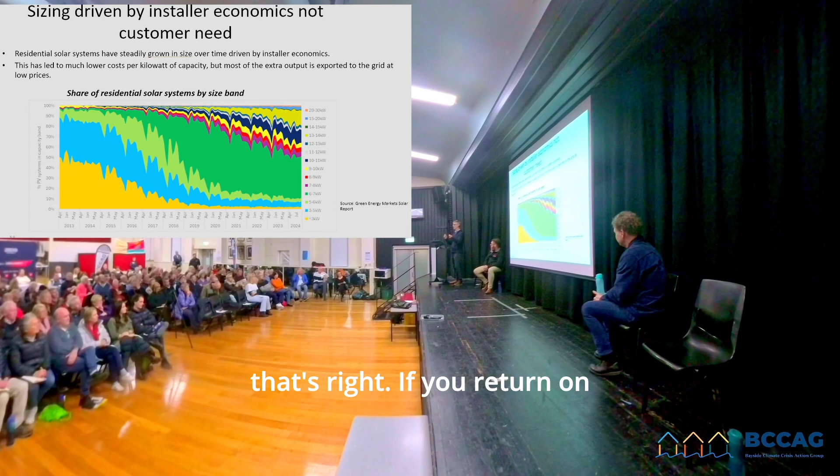And so they'll sit there and say you need 40 kilowatt hours. You'll struggle to ever use 40 kilowatt hours unless you've got an EV, and you'll probably even struggle to use it then, and struggle to fill it - you need a really big solar system. But you will essentially become an electricity producer, not really an electricity consumer. That's probably what's happened - we've already done that with solar, and we're going to do it with batteries too, I suspect. For me personally, I think that's great. But if for you return on investment matters, if you care about your percentage return, if that's really what you're obsessed about - maybe not so great.

But if you want to maximise your aggregate cash flow and you've got a low cost of capital - say 5%, because you're using your home loan - then going big might be fine for you. And when you're exporting a lot of your stored power to the grid, it's still going to be a reasonable investment. So I'll just move to the last slide and finish it up, sorry, because I've gone way too long.

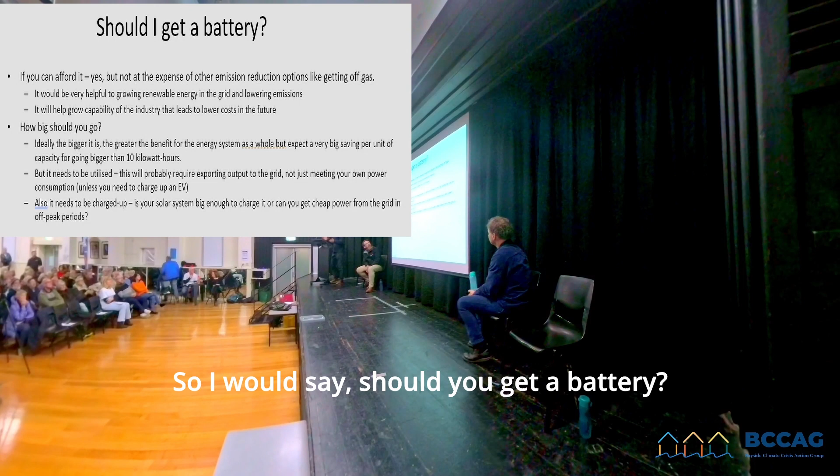So, should you get a battery? Yes, if you can afford it, if you've got reasonable means, but not at the expense of other emission reduction options, like getting off gas, if you want to do that first.

How big should you go? Ideally, the bigger it is, the greater the benefit for the energy system as a whole and the community. But you should be insisting with an installer on a very, very big saving per kilowatt hour if they are trying to push you anywhere beyond really 10 to 15 kilowatt hours. You want to see very little extra increase in price after the rebate is applied to go bigger, because you'll struggle to use it all, and really you'll be handing it to your electricity retailer for a VPP and saying go for your life, try and make it money - and that's really what's going to happen.

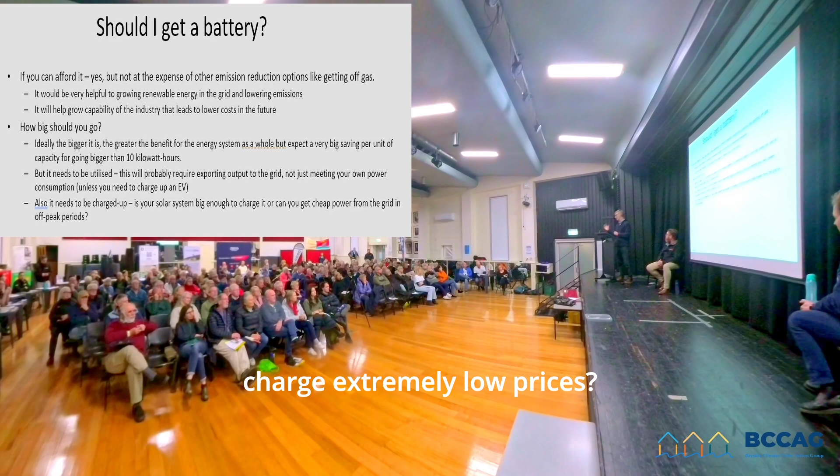The other thing is, it'd be great, you're going to get an EV and you're future-proofed. But the other thing to keep in mind is, do you have a big enough solar system to charge it up, or can you get yourself an electricity retail plan that has a window where they charge extremely low prices? There are some offers out there where you might pay less than 10 cents a kilowatt hour, and you can charge up your battery off that import period. So those are the things I'll leave you with, and I've talked way too long. Thank you very much.